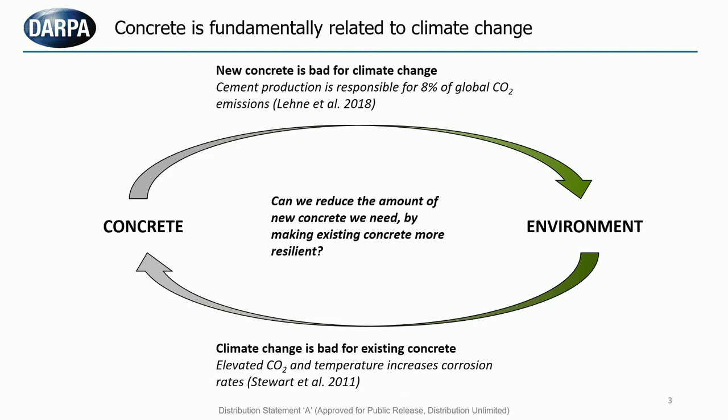So DARPA, the D in DARPA standing for defense, we are concerned with national security. The military, the DoD, relies on concrete infrastructure, not dissimilarly from the civilian space, with respect to its mission and operations. There are some unique architectures in the DoD that you might not find easy analogs to in the civilian space, but the concrete is relatively similar. So things like missile silos and a variety of shoreside infrastructure actually date largely from the early to middle part of the 20th century.

So they're at, or in some cases, exceeding their design service life. It's not really practical for us to recapitalize wholesale all of this infrastructure, in part due to just how much infrastructure that we've acquired over the past century plus relative to our ability to emplace new structures made out of concrete. It would take quite a long time to do that.

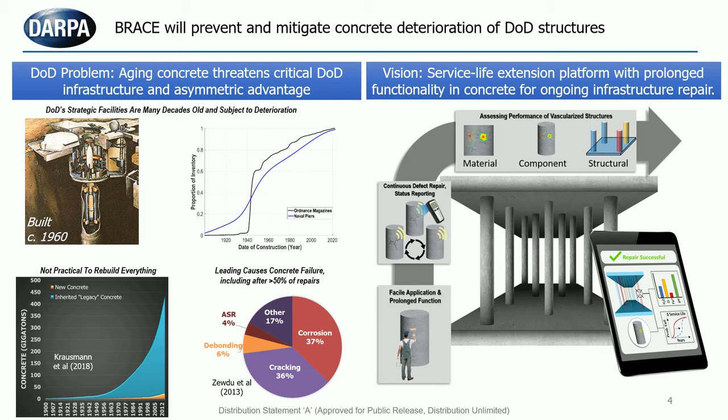So there are some various mechanisms, obviously, that contribute to concrete deterioration. Cracking and corrosion are two of the most common, and they collaborate with one another to foment deterioration in our structures. What we want to do on BRACE is to develop a technology that is relatively easy to apply to those existing structures to maintain a prolonged capability for ongoing repair of cracks, the ability to monitor that process as it's taking place, and understand how it is impacting a structure to which it's applied, such that we can quantify where it's working, the extent to which it's working, and if there are any places in a structure where it might not be working, so we can alert facilities managers or civil engineers to take additional remediation steps.

So again, regarding the DoD use cases, as we were constructing this program, we were mindful of two timescales upon which we might consider repair. So one timescale probably looks very, very similar to problems that this audience is familiar with, what we call a strategic timescale. So this is a relatively slow deterioration process measured on the order of years to decades. And in this, we're concerned with structural concrete.

On the other hand, there is a somewhat unique DoD use case where we might have a structure, perhaps an airfield that's in a far-flung location, and managing the logistics to actually implement a repair, moving the people, the materials, and the equipment necessary to do a repair is very, very challenging. But we might need to make repairs on a very short timeline. So this devolves into sort of a cheap, quick, and good optimization, if you will.

I need to make a hasty repair. I don't have a lot of resources to do it. And what often suffers is the goodness or the durability of that repair. So it would be nice if we had, in those circumstances, technologies that could overlay onto that process that would allow us to extend the durability of that repair made in those circumstances.

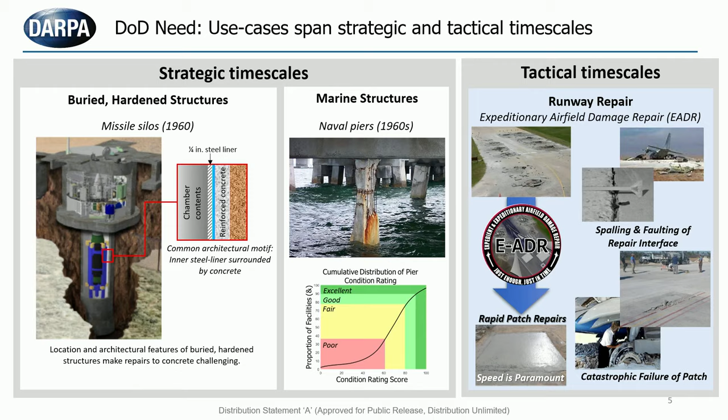So there's a few technologies that we might think about when we're talking about extending the durability of concrete. One of those is some technology that DARPA played a part in funding via the Engineered Living Materials program. So things like self-healing concretes or engineered living materials offer us the promise of structures that are built out of them that can repair themselves when cracks emerge. Unfortunately, most of our infrastructure is not built this way. So this really doesn't apply to this challenge of aging infrastructure that we have.

There's sprays and other topical applications which can biomineralize, they can fill up cracks, but the degree to which they can penetrate the depth of a potentially very large section of concrete is limited, and they tend to be one-time applications. So you apply it. If that repair fails, then you have to come back and retreat. If another defect emerges, then you have to come back and retreat. And what we wanted to do on BRACE was to develop a technology that could check all of these boxes.

So biology offered us a little bit of inspiration in terms of how this might occur. So fundamentally speaking, we're talking at some level of a mass transport challenge. I have material that I need to implement a repair, and I need to get it into potentially some depth within a large concrete segment. How do I do that? So biological structures afford us an example here with vascular systems. So vascular systems transport nutrients and other materials throughout the bulk of an organism.

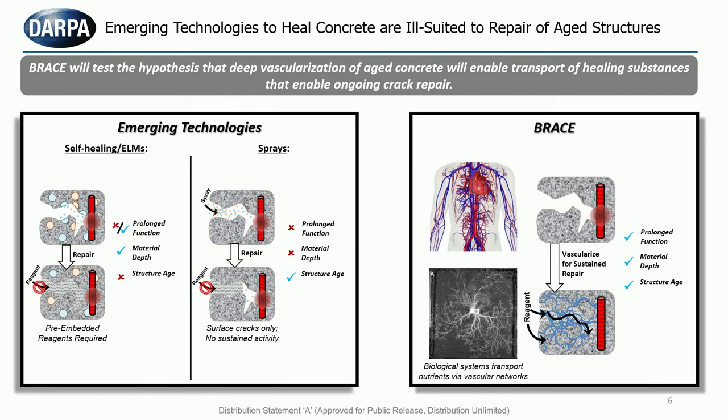And we obviously are pretty familiar with an example that resides within us in terms of our cardiovascular system, but there's other examples from nature that perhaps are more germane to the problem at hand. So things like filamentous fungi that participate in ecosystems. Think about large forests, for instance. And they'll create dense vascular-like structures through media like soil, and they can transport materials quite some distance from a source to a sink in that environment. So the question was, could we impart a vascular-like structure into the cracked, porous nature of deteriorating concrete to facilitate repair? And this is how we structured the program.

This was the fundamental ask when we released the solicitation for proposals. So we divided this program into 2 different technical areas. I'm just going to give a super brief overview of what those are. The first was engineering the vascularizing effector. This is essentially the thing that's going to vascularize the concrete. It'll fill up cracks in that concrete, and it affords us the opportunity to monitor its presence and functionality over time. The second technical area complements this.

It's the set of technologies that you need to actually use this thing. This is how do you apply it, how do you maintain its function over time, and then how do you test material that's been vascularized, particularly across increasing length scales. And then finally, if I've applied this to a structure, I've changed some fundamental material property, can I predict how that structure is going to perform over time?

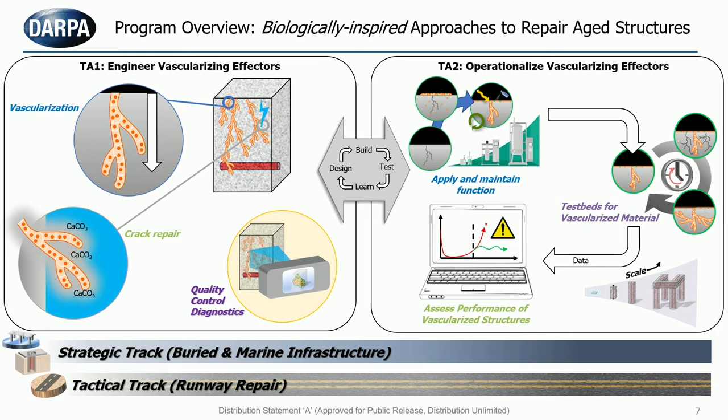So as is typical for DARPA programs, we regularly interact with a variety of transition partners in the DoD civil engineering community, but as concrete is not a problem unique to the DoD, of course, across government to include the Department of Transportation. Another aspect of our programs that's quite common is to try to consider the ethical, legal, and societal implications of new technologies that we're developing.

And if we're successful in the risky endeavors that we fund, what might that actually mean on the back end of a program? So we have an ELSI group that informs the program management team of what some of those issues might look like if we're successful. And with that, I'll conclude and yield the floor to the next speaker.

Thank you. Thank you, Matt. I think we thought it was very important to have this DARPA presentation, particularly for this community. There's an open program, there's funding, there's partnership opportunities, and so just a great opportunity for this audience. Thank you. Let's move now to Franz, please.

Thank you very much for having me. In the next minutes, I'm going to share with you my deep belief that our national infrastructure is the key for reducing, 1, the environmental footprint of our mobility, and 2, to have a competitive transition from a fossil fuel-based energy economy. Specifically, I want to convince you that the technology is already ready in the labs to create energy-storing solar-powered

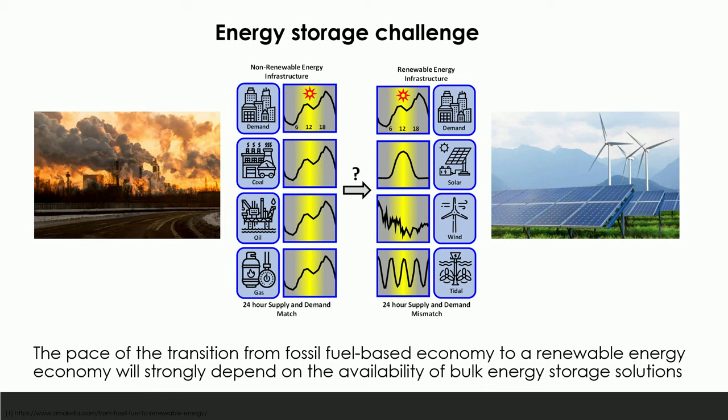buildings, structural frameworks for offshore wind projects, and eventually, and that's not completely ready, but in the making, self-charging roads for electric vehicles. So why do we care about this? First of all, you know that the difference between fossil fuel and electrical energy is that fossil fuel has identity of energy source and carrier, whereas we always have the imbalance between energy harvesting and energy consumption for renewable energies, which is why we need to find something different.

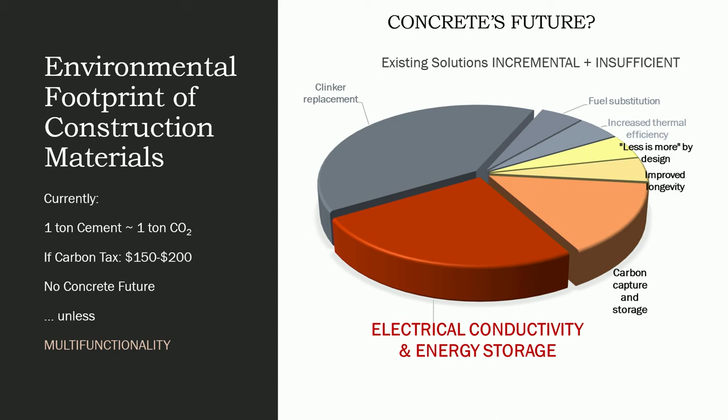On the other hand, we have a material, concrete, which is a fantastic material, but it has its environmental footprint, and the industry is committed to reaching carbon neutrality by 2050. But how can you achieve this? We are going to hear about replacement solutions, but the true solution actually is if you add another function to the material. And that's what I want to show you. So concrete cannot store electricity unless you add something to it. And what you have to add to it is charcoal, actually, to be more precise, carbon black.

So when you mix carbon black with cement and add some water to it with some superplasticizer, what you then obtain is an electron-conductive carbon cement composite. And I invite you to take your coffee grinder, actually, just put cement ratio 1 to 10, so 10 cement, 1 carbon black, mix it, put water, and you have an electron-conductive material. Well, what happens then, once you have electron conductivity, is the following.

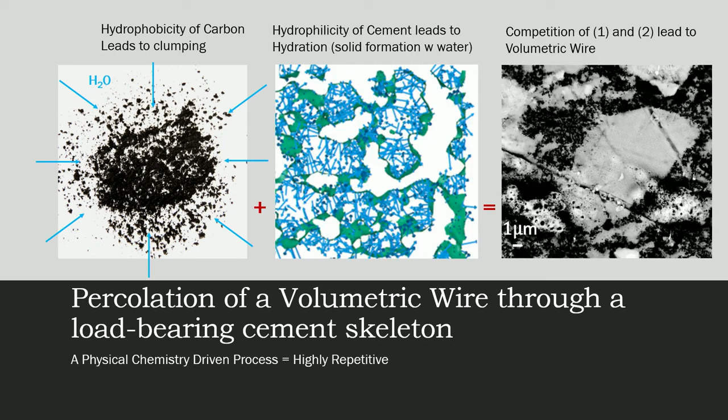Actually, it's magic of chemistry which takes place, that when you put carbon black with water, the material clumps. You know this all from cooking. But then when the same water is consumed by the hydration reaction of cement, boom, you get a percolated volumetric wire through the system. What can you do with it?

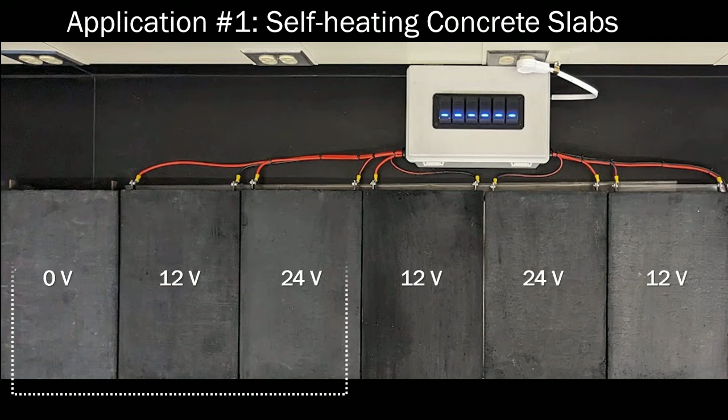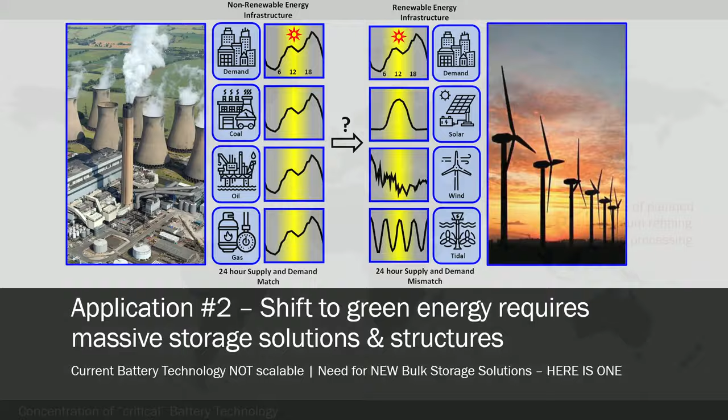Well, the first thing you can do is, for instance, get rid of the salt on your roads, durability, just connect it like a stove, and what you then see is you can basically monitor the temperature of your pavement exactly. These are mortar slabs made of this material. And the second one is, of course, the energy storage. And why should we care here as a nation, not only as engineers?

We should care because when you look where right now the battery technology is produced, you will realize that the US is losing its competitiveness unless you change the precursors, and here, cement and carbon black. Then we stay competitive. So how does the technology work?

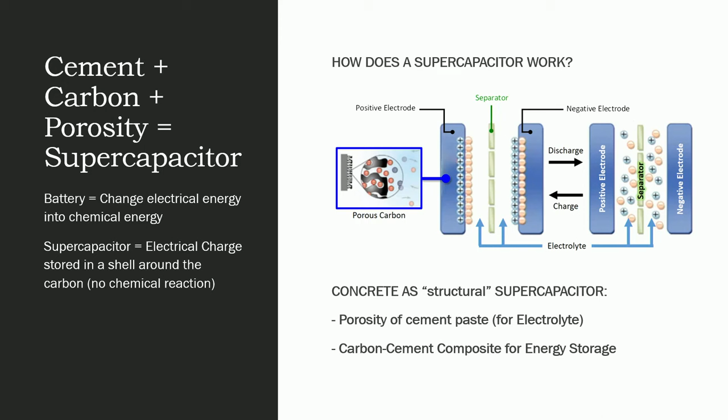Very easy. You have a pore space in your material. It is filled with electrolyte, a salt solution. When you then charge your volumetric wire, what then happens is that the counter ions actually come to this volumetric wire and hang on it. This is not a battery. This is supercapacitor technology. But it works. You have no limit in terms of cycles, etc.

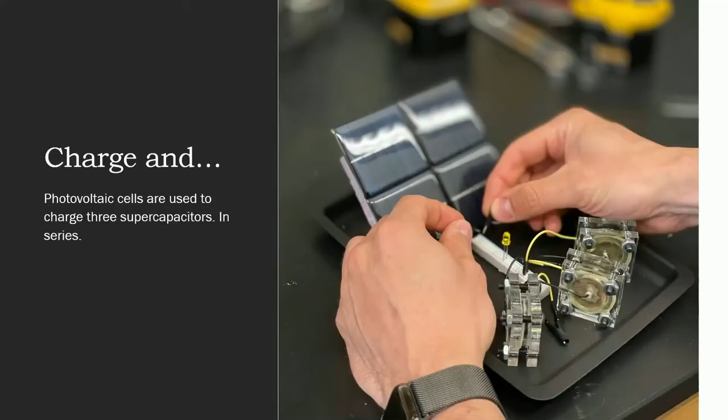Here's a typical example of a small one, how it looks like. So one single one. Don't worry about electrocution, right? We only operate 1 volt for each one of those supercapacitors, so don't worry about that. But then you hang them, you build them up in series, and what you then obtain, you basically have a storage medium. Every wall can be an energy storage solution.

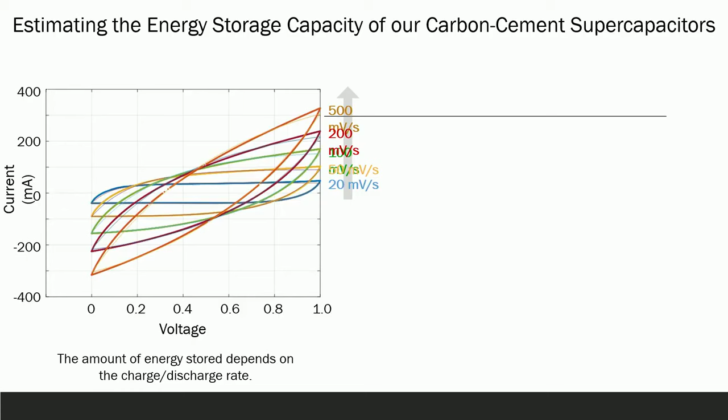Typically, just to give you an idea, you need roughly 45 cubic yards of concrete for a normal house, for a normal dwelling. But the high-end application is, of course, you start then building them up a little bit like Oreos, fill all the columns up with it, and you have then energy storage, as much concrete as you build into your structure.

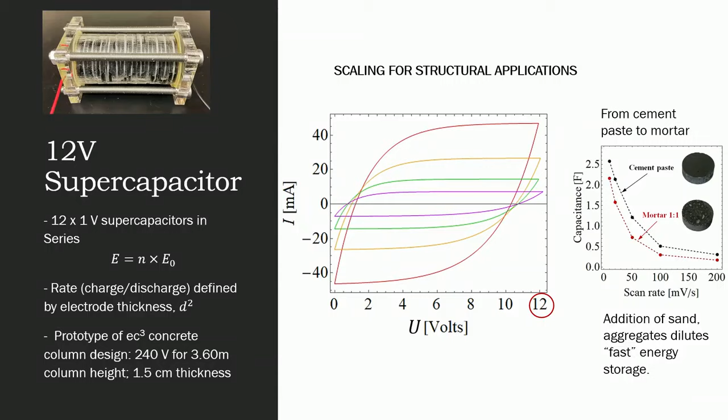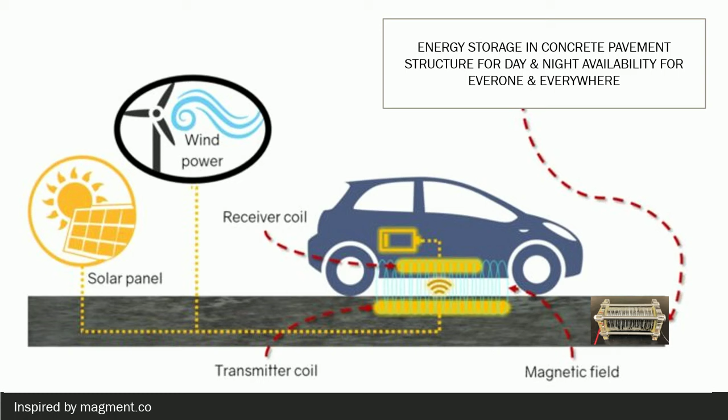Finally, you can then scale this up, and then you come to the high-end application, and I will end there: electromagnetic induction. The idea basically is that you have inside your pavement, now that it's electron conductive, an electric field. You have an electric field in your electric vehicle, and if this frequency is high enough, and it's still an if because I haven't proven it yet, you can transfer this energy from the pavement up there. And anybody who has an electric vehicle wouldn't be scared to find a charging station.

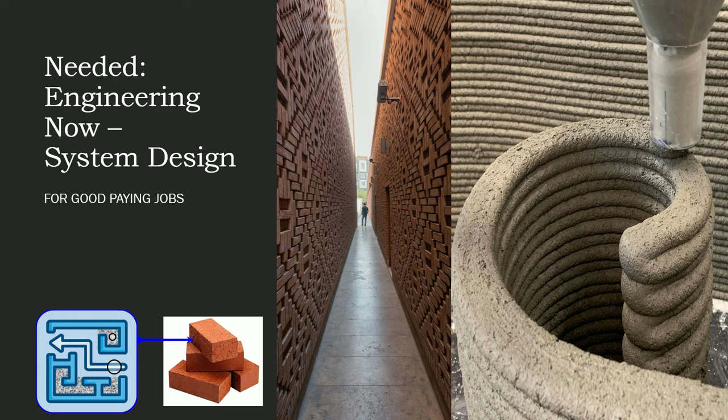It's a pleasure to be here to present what we are doing in a new way to manufacture metals. So 10% of all the CO2 comes from steel manufacturing today. What we are developing is a technology to eliminate the CO2 emissions from steel manufacturing. So it's a millennium problem. Since the Iron Age, 1000 BC, you emit CO2 when you need steel.

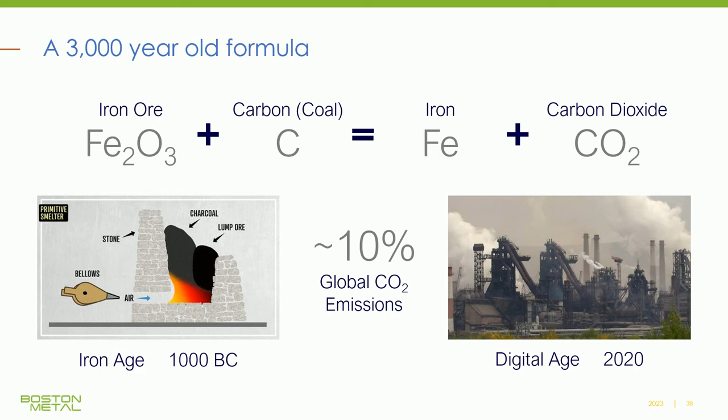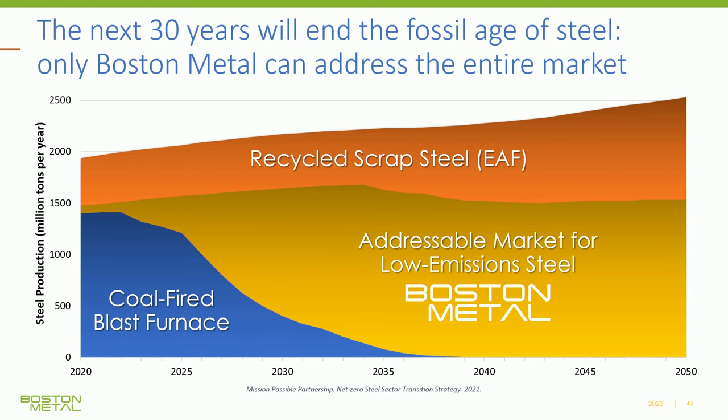And so we are eliminating that problem by substituting the carbon in the equation for electrons. So even if you find 1 billion tons of scrap to remelt, you still need 1.5 billion tons coming from iron ore. And that's where the problem is. All the steel industry is pledging to be carbon neutral by 2050. If this is to happen, you have to phase out all the blast furnaces by the mid-30s. And then our technology would be scalable to millions of tons as needed.

So how does it work? Let's see if I can make this run here. Yeah, so it's an electrolytic cell. You keep adding iron ore in the cell in a soup of oxides, which is the electrolyte in the cell. And you pass electricity. What happens is the electrons will heat everything, make everything liquid, and also will split the bonds of the least stable oxide. So you design that soup to have the iron ore being the least stable. So you collect your iron in the bottom of the cell, and you emit oxygen. So that's basically what the technology does.

The cathode in the cell is the iron that you produce itself. The anode is a chrome-based alloy that we call inert anode because it doesn't participate in the reaction. You passivate as you form oxygen, passing the electricity there, as described, and you continue to pass electricity and produce your steel. Once you collect enough metal in the bottom of the cell, you tap the cell, and you have liquid iron coming out of the cell.

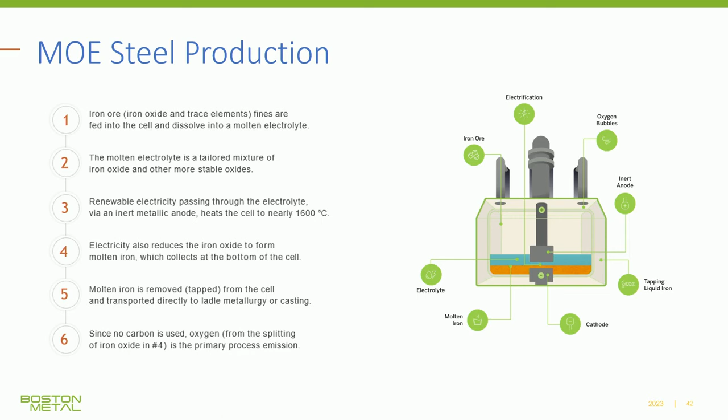The rest of the process to manufacture steel is exactly the same. So you go to ladle metallurgy, correct the composition, go to a caster, and to the rolling mill, and you have your products as needed. Now, what I'm going to show you is the first step of our pilot cell. We are in the pilot stage at this point.

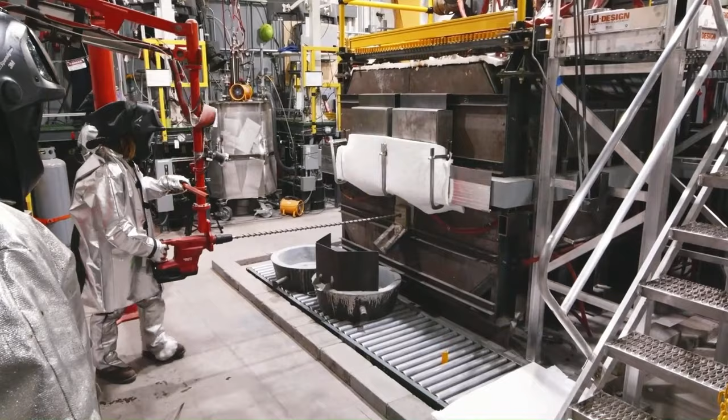Believe it or not, manufacturing steel in Boston. So if it's possible to believe, that's what it is. So I brought it so you can see. So that's green steel, no carbon involved to manufacture.

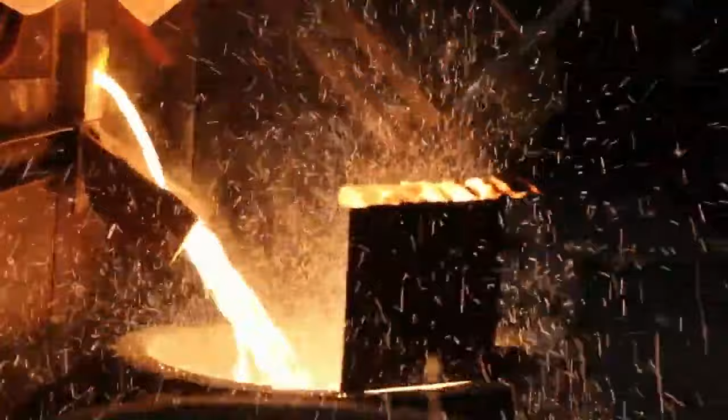Now, the big advantage of the process is that soup of oxides is composed of oxides that are more stable than the iron oxide, as I mentioned, and they are alumina, calcia, magnesia, silica, which, by the way, are the impurities in the iron ore. So, therefore, you can use any iron ore. You don't need to work the iron ore or use very rich iron ores in the process.

So, the same technology can be used to extract value from mining waste. So we are starting our first factory in Brazil, and we are going to extract niobium, tantalum, and tin from slags from the tin smelting. So cassiterite has columbite tantalite as a contaminant. After you process the cassiterite to take your tin, you end up with a waste. It's an environmental problem. So our process can get that negative cost material and transform into value for the industry. So in the age of efficiency, that's very, very important.

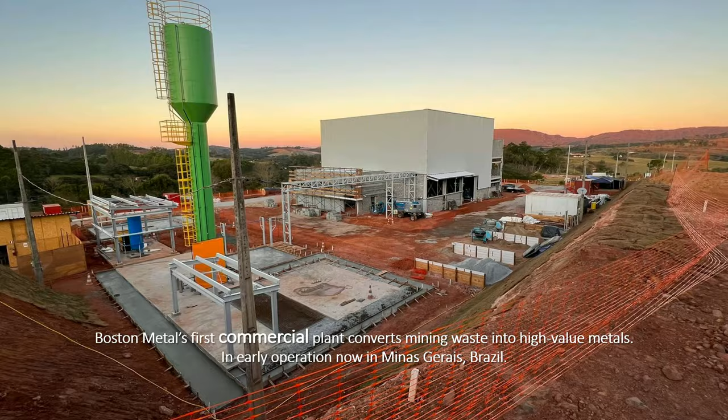And as you will remember, I mentioned the anode is made out of a chrome metal. So we are taking advantage of the fact that we need chrome for our cells and for our demonstration plants and eventually the industrial facilities we will build. So we are building our own plant to manufacture chrome metal, which will be the first one in the United States. So 100% of chrome metal is imported today. We will be the first chrome metal manufacturer in the States.

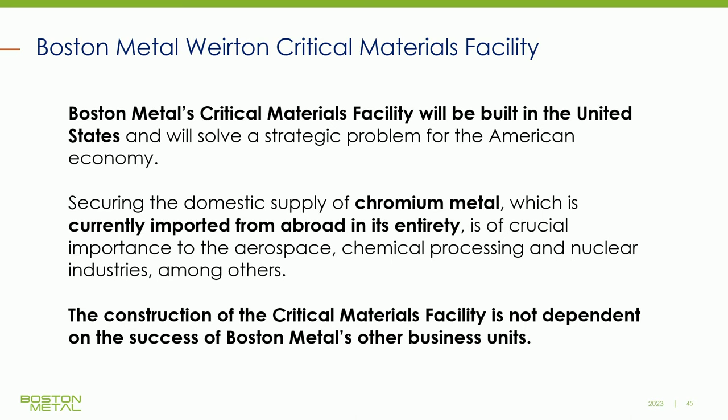Chrome metal is very important. There is no industry without chrome metal. So aircraft engines need nickel-based superalloys, oil and gas, energy, automotive, all the industry needs chrome metal, and 100% is imported. We are going to manufacture domestically very soon.

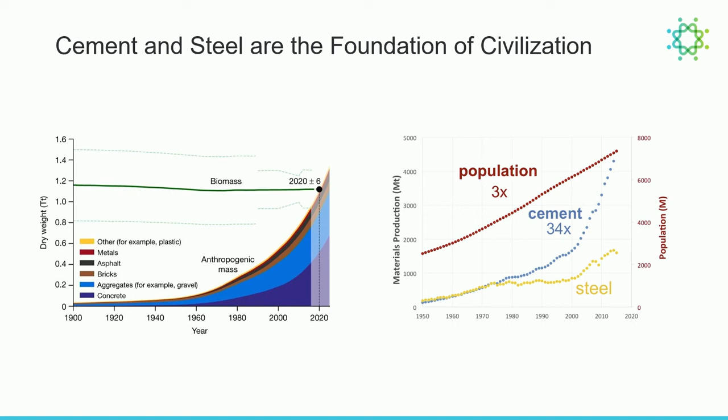All right, going back to basics. Cement and steel are the literal foundation of our society. You probably all know this, but there's more anthropogenic mass on the planet now than biomass, and most of that is concrete. And there's a reason we use these Roman age materials, and that's because they are freaking amazing. They're cheap, they're everywhere. You can use them in a huge number of applications, and most importantly, we've got hundreds of years, or in the case of steel, thousands of years of data about their properties.

Of course, there's an issue with them as well, which is that they're responsible for massive amounts of emissions, but they also comprise trillion-dollar markets. And in both the case of cement and steel, unlike almost everything else we deal with in decarbonization, most of the emissions are from the process chemistry, meaning that if you decarbonize energy, you don't necessarily decarbonize steel or cement. And it's really fundamental to the chemistry. It makes them very recalcitrant to decarbonization.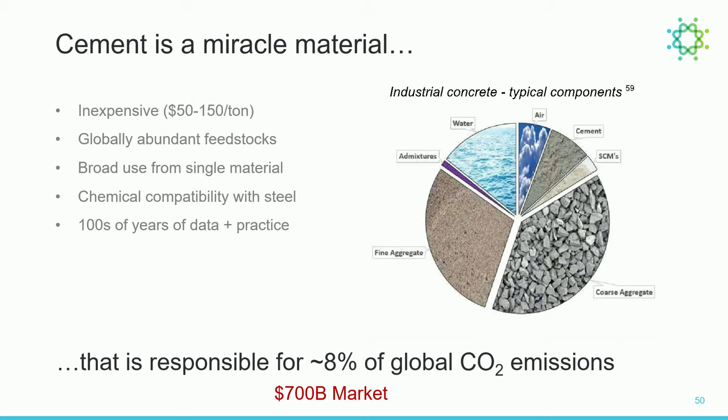So what needs to be true for a low-carbon cement solution to actually matter? I would argue that you need to find a material that is absolutely trusted. The cost needs to be effectively equivalent. You need to deliver the same or better performance to conventional materials, and you need to be available at true scale, and I'm talking billion ton per year scale.

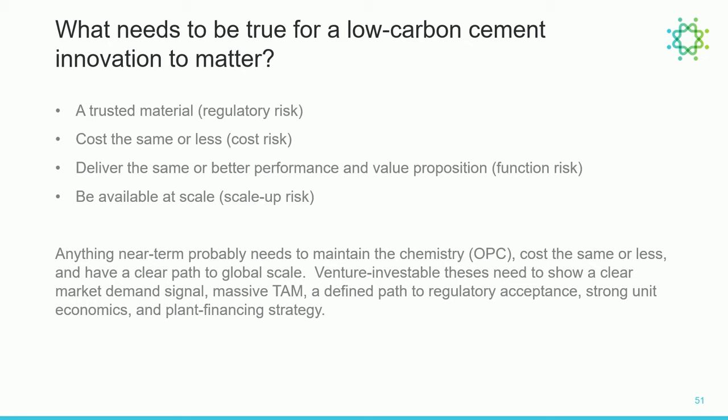And that really boils down to, this is maybe a cynical view, but anything near term is probably an extension of the existing chemistry. Of course, there's much more opportunity in the long term for alternatives, which we'll talk about in a moment. And I'll just say from a venture perspective, we're looking for things that have return propositions, which means we're looking for, within the context of market boundary conditions, what actually provides for highly profitable unit economics as well. Make Mayor Pete's decision all that much easier. So when I think about the outlook for decarbonized cement, there's really 5 main ways to think about decarbonizing cement.

The first, that's nearest term, it's already being implemented, is the extension. Cement actually is not the building material. Concrete's the building material, as you all know. Cement is the binder. So how can we use less cement per unit concrete? One thing we can do is supplementary cementitious materials like we use today. You can also think about strengthening the overall concrete mixture, so you need less cement per unit concrete.

You can think about mixed design, so there's less space between chunks of aggregate in order for you to have necessary binder. In all these cases, we're talking about an extension of the existing ordinary Portland cement framework, and this is already being done to reduce the clinker factor. You can probably get to about 50%. Now today, under prescriptive standards, you can't in most parts of the world. But you can probably get to maybe 20 or 30%. And so there is an opportunity for regulators and for the Department of Transportation to really be a leader in pulling through innovation that can allow for the simple extension of the existing material system down to further reduction.

Now, in the midterm, you can start thinking about reducing the emissions from the actual clinker itself, from OPC, and there's 2 main ways to think about doing that. The first is to deal with the energy associated with that, which is about 40% of the emissions. That will naturally come as we decarbonize the energy system. Maybe the last to fall, since cement uses the cheapest sources of energy today. Or maybe more novelly, you can think about actually changing the process itself to make ordinary Portland cement.

Today we use limestone. That's the source of process emissions. The first thing we do is boil off CO2. What if we found a source of calcium that was scalable that didn't have CO2 in it? An example of a solution like that is a company called Brimstone, making the exact same material but just from a different feedstock. In the longer term, we can start thinking about alternative chemistries.

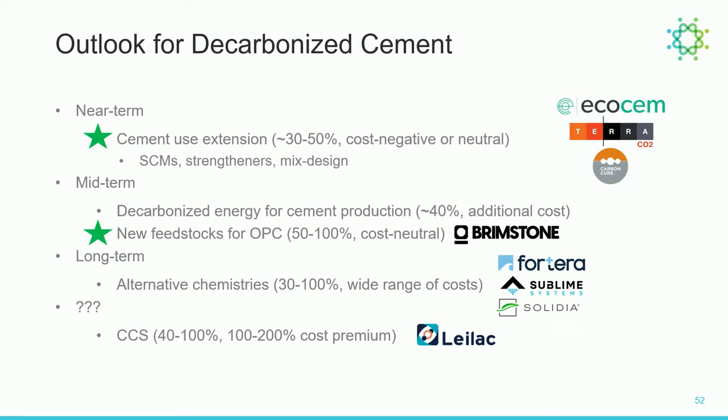And then, of course, the thing we all measure ourselves against is CCS, which someone else, I think Franz, had. It's basically a 200% premium if today you want to use CCS on a cement plant. So cement is the last to fall because of this. This is an interesting factoid you may not be aware of. Concrete is the lowest emissions material we make, and steel's not that far behind. So we just use so dang much of it. And so let's talk about steel now.

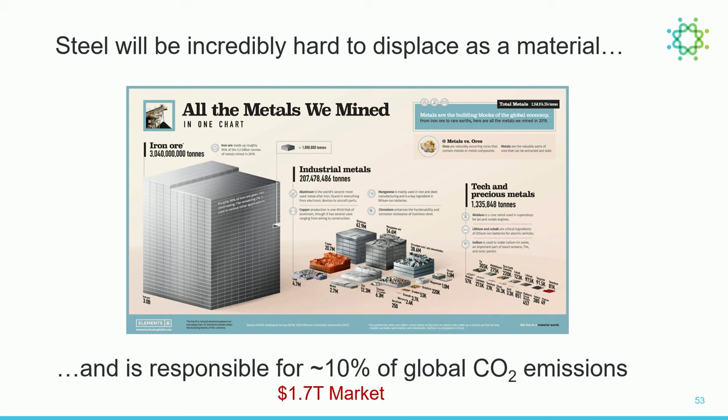Steel, that might be even harder to displace than cement. And the reason why is that metals are amazing. They're moldable and castable and weldable. They're strong, they're tough, etc. And steel is the undisputed king, and it's the undisputed king because of both performance, but really cost. And it's responsible, like Tadeu said, for about 10% of greenhouse gas emissions, the majority of which are from the carbon that we're using to rip oxygen off of iron oxide.

And so when we think about the outlook for decarbonized steel, in the near term, we can talk about decarbonizing some of the energy used in steel. There's been electrification, secondary steel, but these are probably 10 to 20% kind of improvements along with efficiency. You can think about using alternative reducing agents. So instead of using carbon to rip the oxygen off, you could use hydrogen.

That's discussed. Great solution. Today, 70% of all steel is blast furnace, 25% is recycled, and 5% is direct reduced iron with methane. You could think about replacing some of that methane with hydrogen. Hydrogen also costs more than methane, of course, but that's a potential solution in the near term.

In the midterm, I won't belabor it because you just heard from Tadeu, but Boston Metal is a great example of a solution that follows the 3,000-year trajectory of reducing the cost of steel by improving the efficiency. And the only place to go from here today of thermochemistry is to move to electrochemistry, which is precisely what Boston Metal is doing.

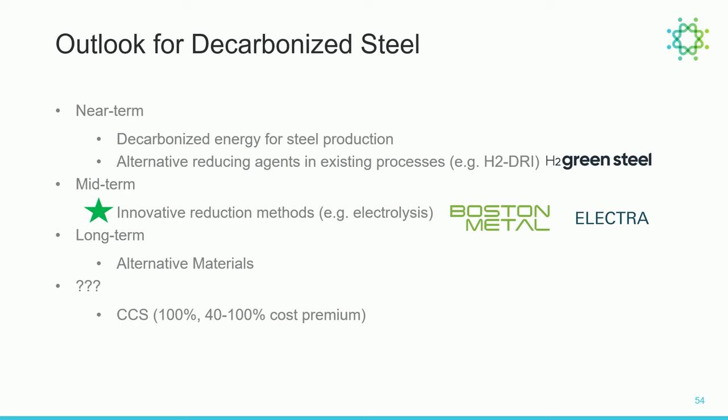In the long term, we could consider alternative materials, but I'll tell you, steel is the lowest emissions, lowest energy, lowest of all the materials we make today. So anything you replace steel with is typically worse. Maybe biological materials or carbon-based materials could be an exception to that. But we should be open to thinking about alternative materials. And then CCS, of course, is a default option.

So I'll close here by just thanking you for your interest and involvement here. There are some key needs we already talked about, which is, one, these are merchant markets, which means we need absolutely to have advanced procurement and offtake commitments in order to have a plant financing for any of the solutions, whether it's a Boston Metal plant or it's a Brimstone plant or whomever you like, any of the innovations that this panel is working on. We need to have clear paths to financing plants.

We need to have opportunities to participate in any of the incentives that are coming through in the IRA and otherwise. And there needs to be clear standards and assistance in navigating the certification process. Thank you, Mo. But I'd like to leave you with a message of optimism, because there are real options, and there's a really strong pipeline of innovation, which I could not have told you 10 years ago. These are truly reasons for optimism.

And I'll conclude by saying the DOT is truly critical. The government is the most important customer and standard bearer for infrastructure materials, and the DOT is the most important standard bearer within the government. So thank you for your interest and involvement. Let's go decarbonize some infrastructural materials.

Thank you, Cooper. While Maggie comes up, I'll just say, Cooper, thank you for engaging with us, this community. Thank you for clearly articulating the needs. I saw the slides, procurement and other things. And so thank you for that. Thank you also for your continued engagement with this community. Now let's turn to Maggie to give us her perspective and deeper dive.

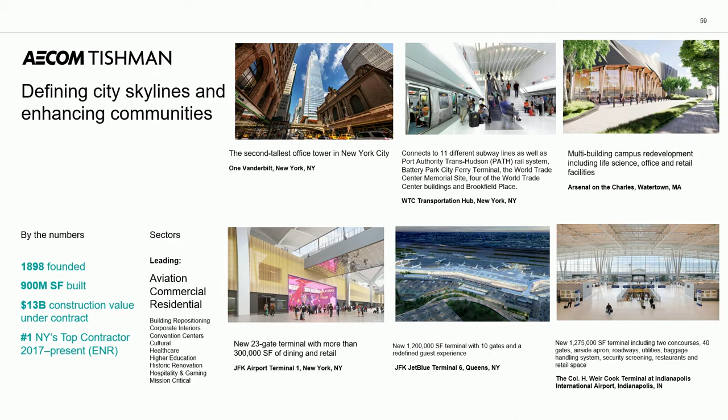So, well, here we go. We believe infrastructure creates opportunity for everyone, uplifting community, improving access, sustaining our planet. Some of you might know our company. I really don't want to talk about it, but one thing I want to clarify, we don't just build tall buildings. We do airports and other infrastructure. There's a few examples that we have, some past and current projects that we're doing. And this is the slide that earlier the Secretary was talking about.

The reason why I'm talking about this is we are doing 16,000 PSI concrete mix design in high-rise buildings. And we have been collecting data. And we know that if we can do high-rise, we could do something about infrastructure and roadways. And this is just a few things. And one of the things that we have done in high-rise mix design is we did replace cement with waste landfill material like fly ash. So it works.

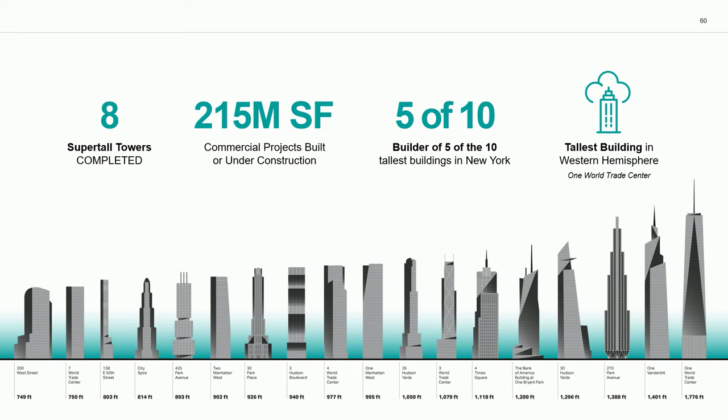Now, the other thing that we want to talk about is the importance of embodied carbon. We really can't put the genie back in the bottle. As you can see, while operational carbon can be designed, maintained, and upgraded out of the building, the embodied carbon in the construction material can never be recovered. It is front-loaded and already in the atmosphere.

As you can see in the example behind me, the blue is the embodied carbon. What we can do is the green. We can't go back. We only can go forward in the future. How can we reduce it? And that's up to us to help. And the grid line, the straight white line, is a zero carbon grid. We can do it. It just matters how and when and where the money is.

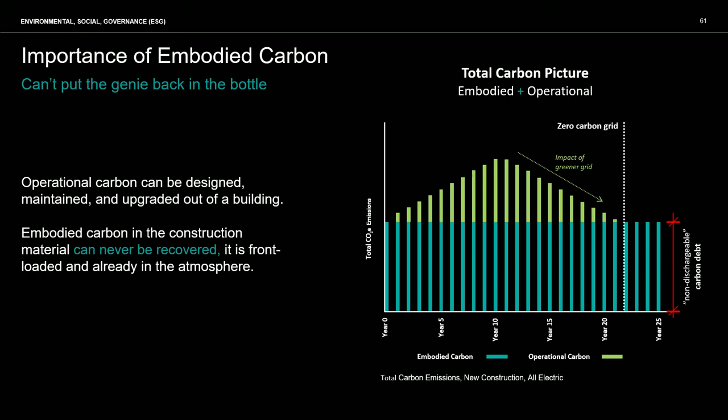The other thing is, I'm the outgoing president of the Concrete Industry Board, and we actually issued a green concrete guideline last year. And cement production is roughly about 8% of global carbon emissions. CIB has been working to help reduce the carbon footprint of concrete.

We have voluntary measures that designers and engineers consider as a part of a carbon footprint reduction strategy. We actually came up with a strategy to try to do this. So I'm just going to give a little bit of a highlight of what this concrete guideline is. It's a roadmap. We want the highest concrete standard with zero extra cost.

We want to use replacement material. We want to use the letter grade. As you can see on the other side, there's a letter grade from A to F. And there are the formulas with which we can calculate the cement, the strength, the GWP and the EPD.

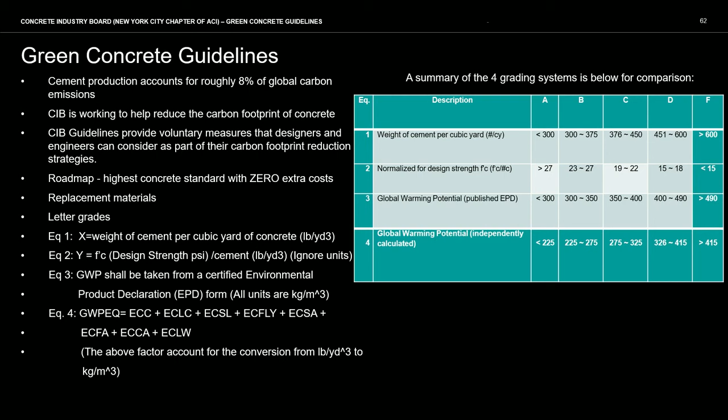Before I go to the example, I just want to remind myself, as well as everybody else, about cement manufacturing: the limestone, clay. As everybody knows, we have to heat it to 1,500 Celsius, equivalent to 2,732 Fahrenheit, pretty hot. And we're using fossil fuel, and we come up with, like the panel said earlier, 1 ton of CO2 for every ton of cement.

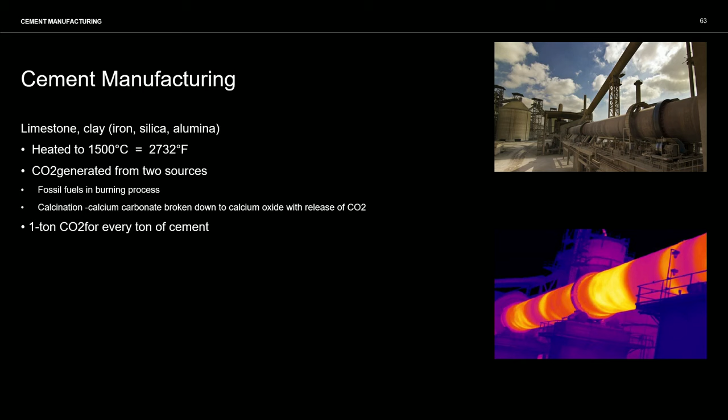Can we do something about this? Like the steel, can we use an electric furnace? That's a question someone needs to help us out with. Now the other one is, what is concrete? Mostly the ingredients combined and mixed in the plant or on the truck. These are the typical formulas, as everybody knows, but we are only concentrating on the cement, at 10%.

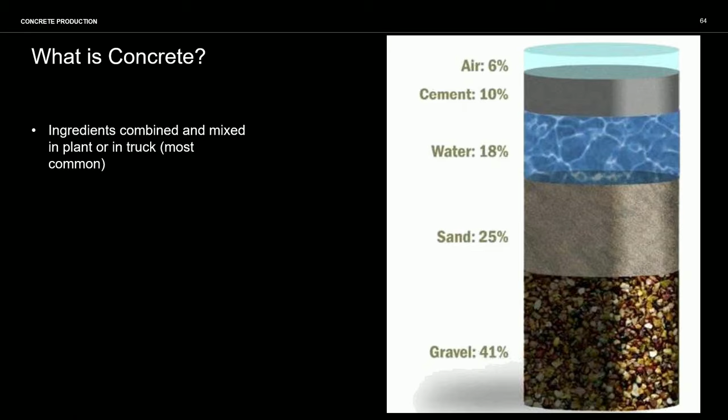So right now, this is the example that we talked about earlier. We're using the 4,000 PSI mix. We use 50% Portland cement replacement, obtaining design strength in 7 days, and we're using 28-day strength to come up with 7,200 PSI. So for the equations, which give the letter grade, on equation 1, the cement, we rated A.

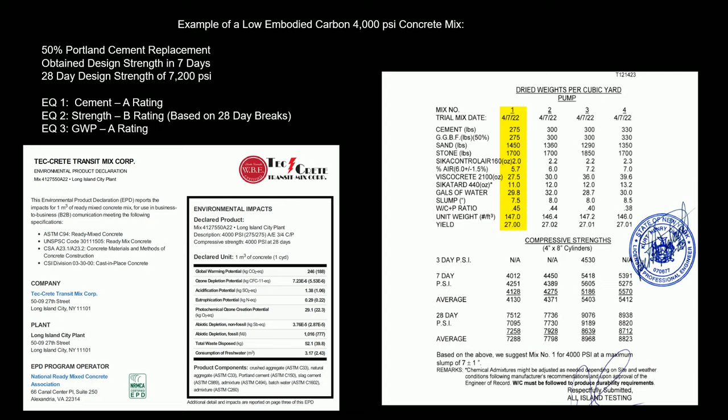Equation 2, with the strength, we rated B based on using the 28-day break. Equation 3, which is GWP, is rated A. This actually happened. So for the conclusion, really, most concrete should be able to achieve a B rating in most cases, but the best mix for the environment may not be the best mix for the project.

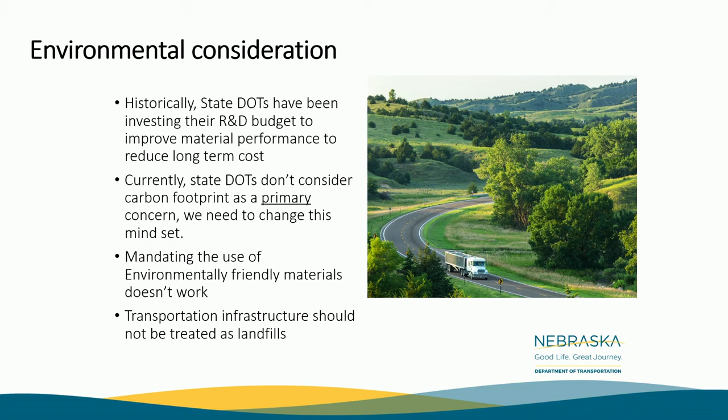So barriers to implementation. The Secretary said it well. He did not like potholes, and neither do materials engineers, because they hear it from their mayors and their governors. So state DOTs want to make sure materials don't fail. They have a history of performance. They know what to count on. And we've had really good examples of the things that we wanted to do and it didn't work.

In Nebraska, I can tell you, the Class C fly ash that came in back in the 80s: just replace 25% of the cement with it, it'll be great, you got the strength you need. Well, later we found out that wasn't a very good design for us because of the ASR we had with the concrete. We needed a Class F fly ash, not the C that we have locally. We now use both of them, but we've engineered it to account for that.

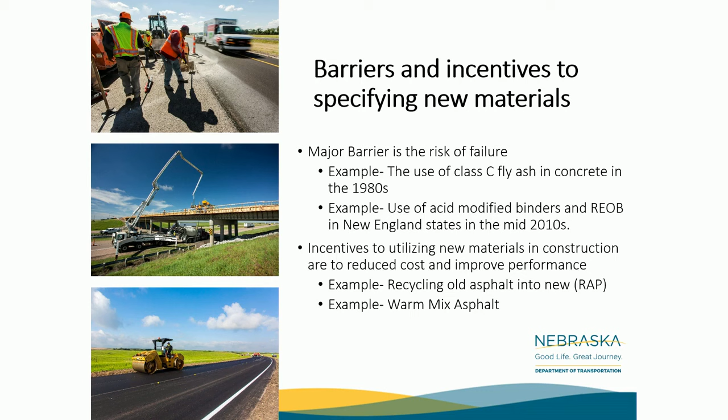New England states, for example, had a terrible experience with using REOB, engine oil bottoms, and acid modification earlier. They didn't even know those things were in the binder for the asphalt. Manufacturers were doing it just to meet the performance tests in the lab for Superpave, and later we found out that they were using it the wrong way, and lots of premature failures, and that wasn't any good. So we want to make sure when we bring new materials, we do our homework and we do it right.

So how do you talk to your state DOT and get them excited about the new material you want to introduce? Work with them early. Don't wait until the product in your mind is all done and ready for prime time and then find out it's really not going to meet the state needs. Get them in early. We do not normally like proprietary items because we want to put the stuff out for bid and we want to get competitive bids. And proprietary material is challenging for the DOTs to use.

But if you work with the Committee on Materials and Pavements of AASHTO, we will create with you some performance-related specifications that you can put in place where all the DOTs can play from the same sheet of music and use your material as long as it performs the way it's supposed to. So I've gone over lots of issues that you probably all know, and this has been fun.

Thank you. Thank you, Mo. Mo, thank you for hitting cleanup here and really hitting it out of the park, in the sense of what does it really take for us to move the needle here and get some of these new materials that perform and also have some climate-saving benefits? How do we get those moving? And so you really laid out the reality of getting those things implemented.